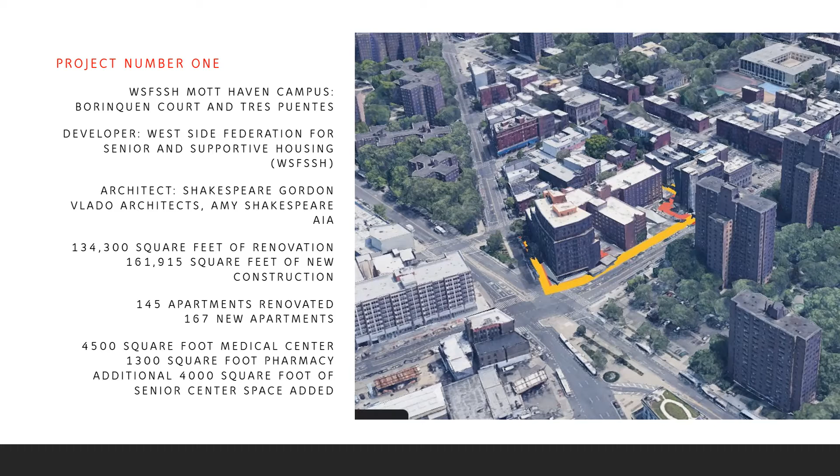This project is located in the Mott Haven neighborhood of the Bronx. It was developed by the nonprofit West Side Federation for Senior and Supportive Housing. There's an existing building in the center of the site that was built in the 1980s, and 2 new towers on the west and east added apartments and additional services to the site.

At the street level, the three buildings are linked. In the west building, there's a 4,500 square foot medical space, 1,300 square foot pharmacy, and social services offices. The three buildings are linked.

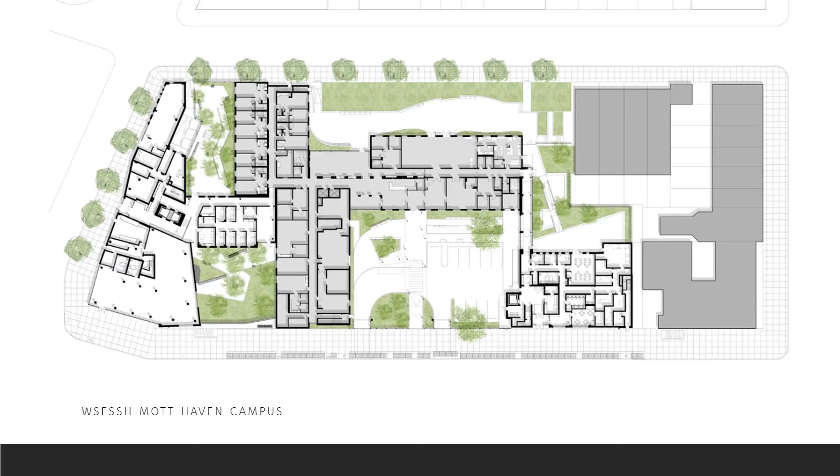In the east building, there's 4,000 square feet of community space, and this original 1980 building has the original community space. There is a circular drive that was added at the front, along with a canopy, to improve the ability to wait for taxis. This is the original 1980 building, which was built as a HUD 202, a federal housing program for seniors.

When Borinquen Court was renovated in 2011, new mechanical systems, new windows, and renovation of 145 apartments were done with the tenants living in place. The new canopy and the circular drive allow residents to wait safely for taxis without having to go out into the street.

The two new buildings are called Tres Puentes, which means three bridges, after the bridges over to Manhattan that are visible from this site. This west building is 11 stories high and has 112 units. At the street level on the corner, you can see the new medical center, and the pharmacy is on the opposite corner.

The building is located on the corner of 3rd Avenue, which is a major shopping street in the Bronx, and East 138th Street. The building site is slightly triangular and follows a main avenue of 3rd Avenue on the left side of the plan.

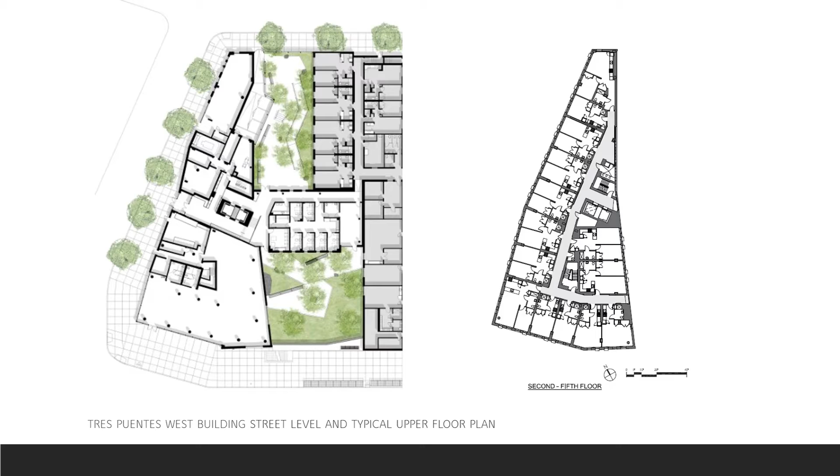The east building has 8 stories, 55 units, and an additional 4,000 square feet of senior center space on the first floor. This end of the site used to be a parking lot for Borinquen Court, which was underutilized.

In this street level plan of the east building, you can see one of the 4 gardens that were added on the first floor with hardscape and green spaces for the residents and the community center.

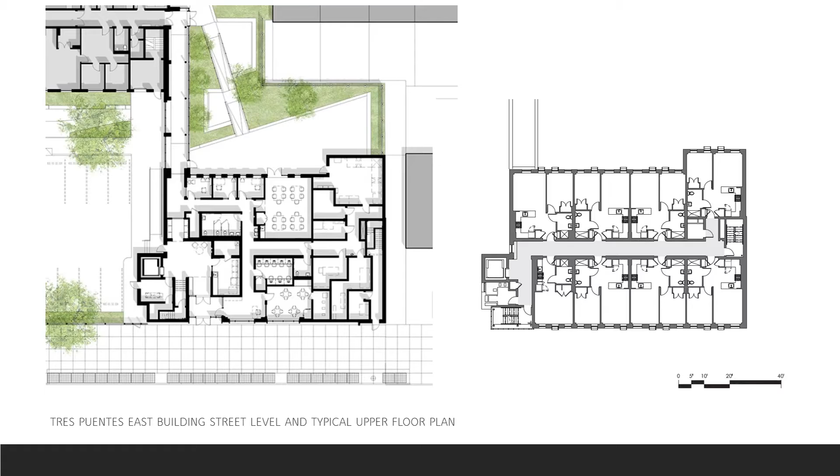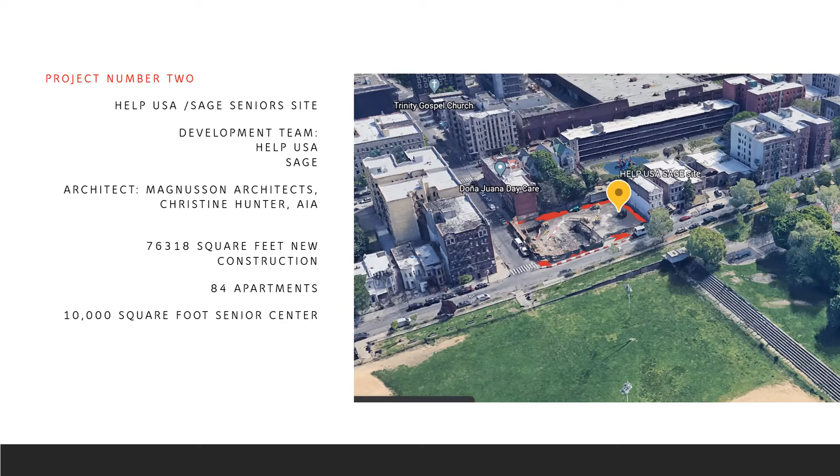On the first floor, you can see that the residents enter their lobby through the corner and that the senior center is entered from the side street.

Most of the first floor is senior center usage. There's a computer room, a wellness nurse, a library, classrooms, a kitchen, and a large commons space.

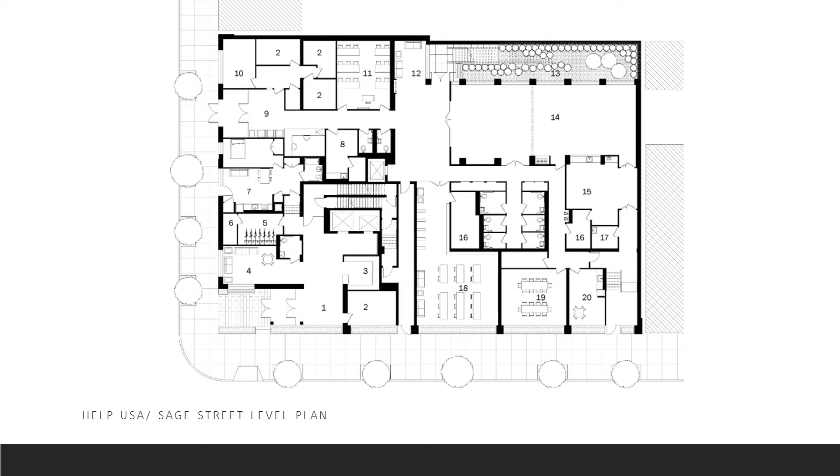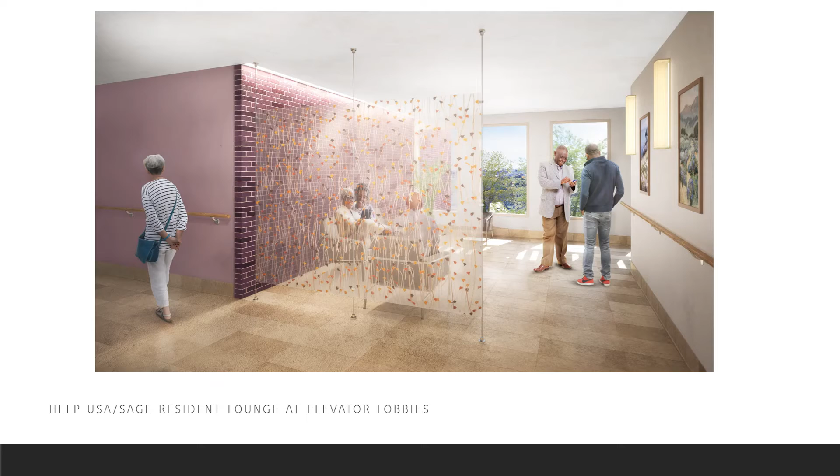There are garden spaces on the first and second floor, which can be used by the residents as well as the center members. On the residential floors, a small seating area is provided at each elevator lobby.

At the top floor, there's a rooftop garden that's provided for the building residents. There's also a community room and laundry room next to this outdoor space.

Roughly 60% of the units in the building are studios, and so an alcove design was developed to allow a little bit of additional privacy for the sleeping area. Rather than creating 2 rectangular units, they interlink.

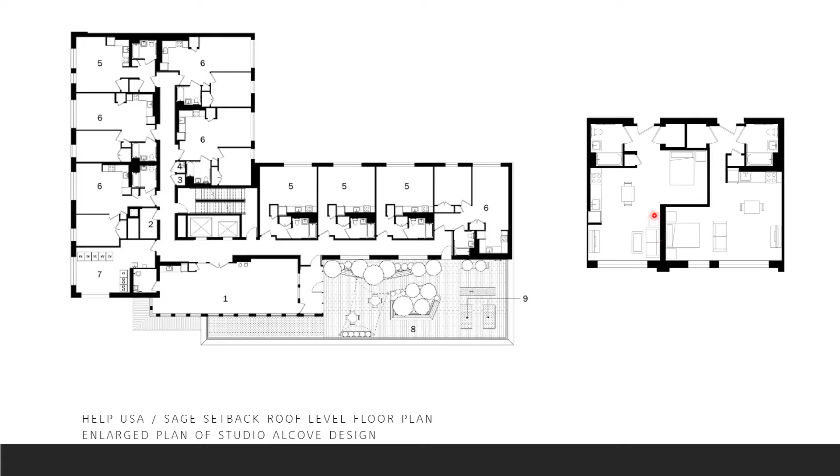The next 2 projects are built within an existing public housing campus. The New York City Housing Authority, or NYCHA, is the largest public housing agency in the US, and it's also the largest landlord in New York City. 1 out of 15 New York City residents live in NYCHA apartments, and these apartments represent 8% of the rental housing in New York City.

On average, 40% of NYCHA residents are senior citizens. Most of the NYCHA apartments are on campuses that have 10 to 20 buildings. These campuses were built in the 1940s through the 1960s, an era when the towers-in-the-park approach was popular. Tall towers surrounded by open space are good in some aspects, but unused open space can be unsafe.

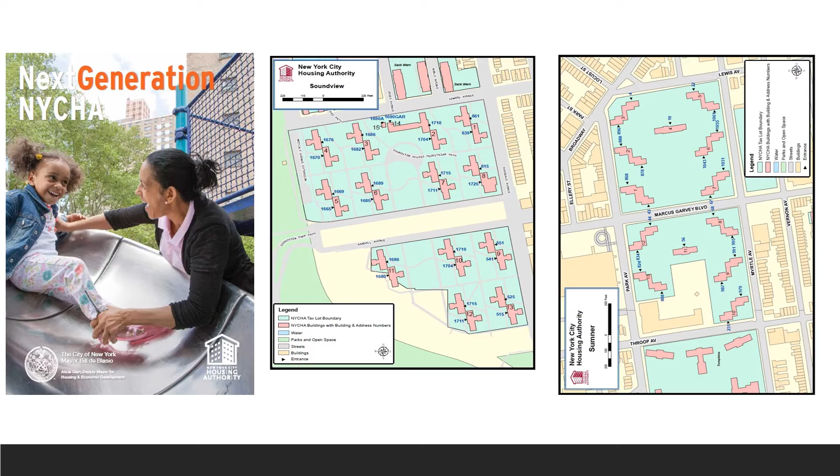In 2014, a series of RFPs sought development teams to provide new housing on the site of NYCHA buildings, and some of them specifically addressed senior housing. There was a community engagement process with existing residents to identify the kind of amenities that each campus needed or preferred. In addition to providing available land and permanently affordable housing, these developments then help fund repairs on the existing buildings.

The NYCHA Soundview campus is roughly 11 hectares, and it has 13 buildings with 1,300 apartments. This campus was completed in 1954. 17% of the units are currently occupied by single seniors. The site for the new development is open land and underutilized parking lot space on the campus.

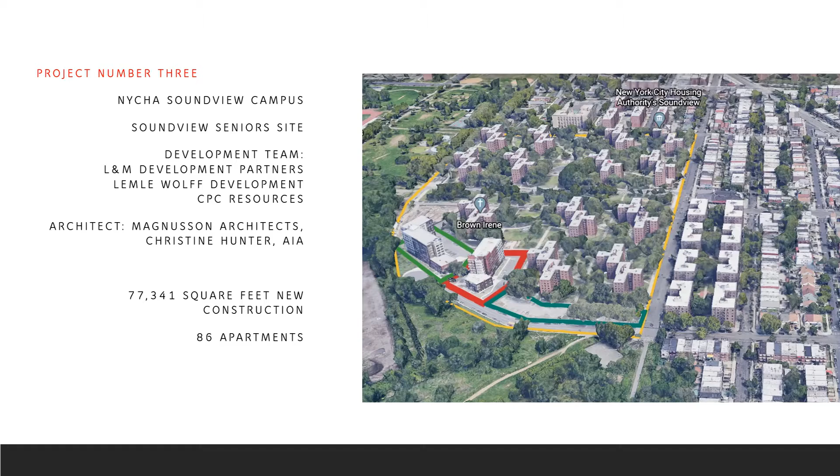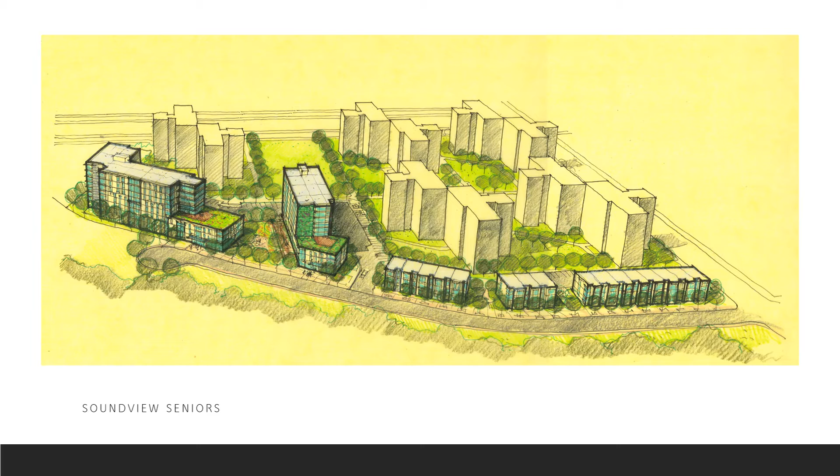The development team is building 3 buildings in phases. The first building is an 8-story building with 120 apartments built for families, shown on the left in the rendering. The second building in the middle is an 8-story senior housing with 86 apartments. The third phase is a home ownership model with attached townhouses, scheduled to start construction later this year.

A community room opens to a garden that is shared between the family and senior buildings, with lounge space near the building entry. This project was completed in 2017 and has nice south-facing and west-facing windows provided with a sun shading detail.

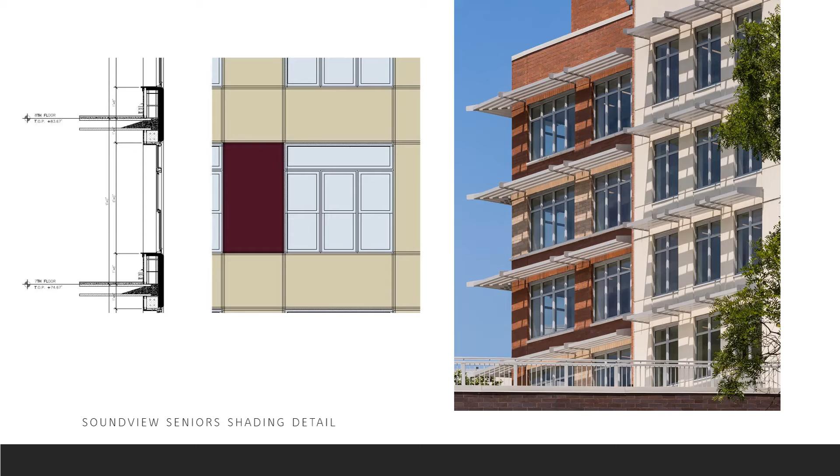This project is located in Brooklyn. The NYCHA Sumner campus is roughly 9 hectares. It has 13 buildings and 1,100 apartments. This campus was completed in 1958. 20% of the units are occupied by seniors living alone, and the site for the new development is currently green space.

The Atrium at Sumner project was awarded to a team of 3 entities, including 2 nonprofits. Nonprofit Self-Help Community Services has their main campus in Queens, and we'll see one of their built projects in a few minutes. The nonprofit RiseBoro Community Partnership was founded in Brooklyn and provides social services to over 20,000 New Yorkers. RiseBoro built the first 100% affordable passive house apartment building in the United States. The third team member is Urban Builders Collaborative, the development arm of Lettire Construction, a builder of affordable housing.

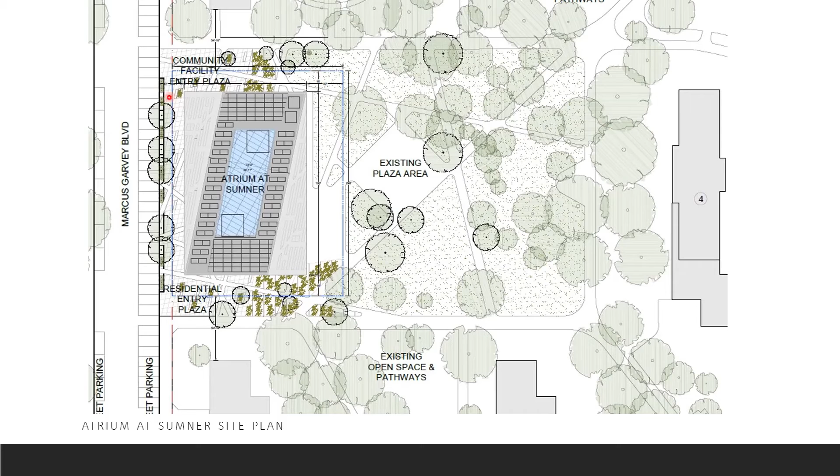In siting, the building entries face plazas rather than facing the street, in order to better link the building to the existing buildings on the campus.

The interior plan is laid out around a 9-story atrium, which is an unusual typology for American housing. It means every apartment door will have a view of the sky and that cross ventilation is improved. You can see here the glass-topped atrium roof and the solar panel arrays up on the roof.

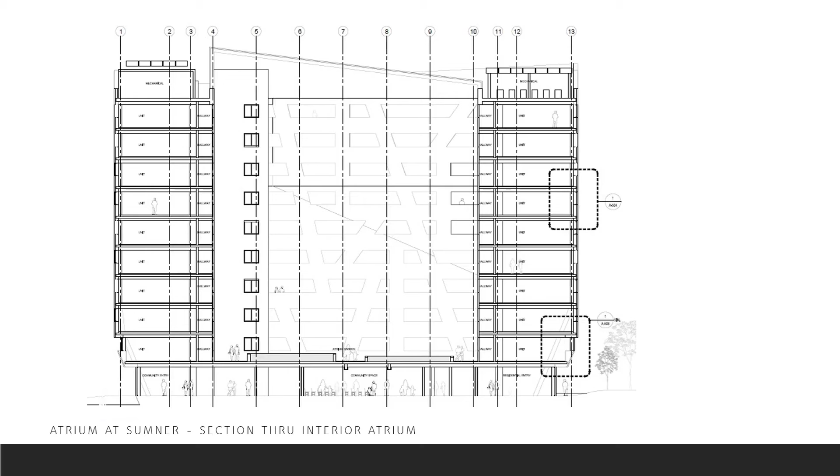This building has a striking facade with monolithic sloped surfaces designed to break down the building mass. The building actually folds and slopes inward at the base, widening at the street plazas where the entries are.

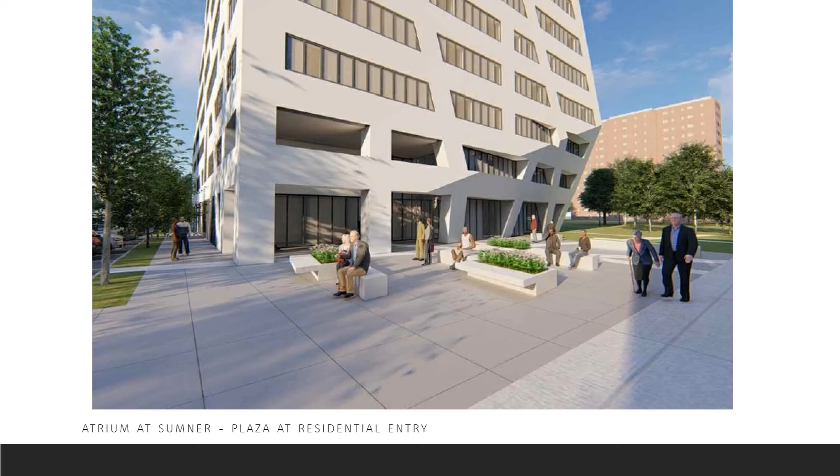On the south side of the site is a plaza with the entrance to the residential building. There's a 2-story high entrance underneath the overhang, and at the street there's a meeting room and social services offices for the residents. On the 2nd through 10th floor, there are 180 apartments.

The street level plan on the left shows the community center entry from the North Plaza at the top of the plan and the residential entry from the South Plaza. Social services, office, and meeting spaces for the residents are next to the building entry.

The plan on the right is the 2nd floor plan. It shows the interior winter garden at the base of the atrium. There are 2-story high spaces here and here that allow a view down to the building entries. Off of the Winter Garden is a library and community room, laundry, and exercise room for use of the building residents.

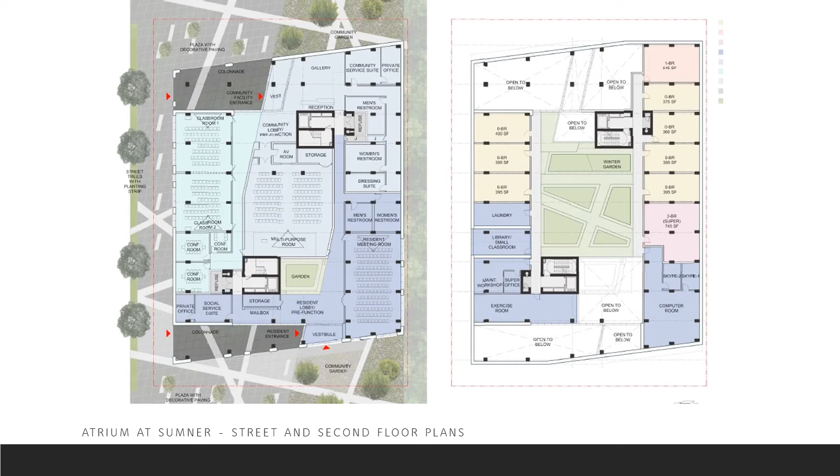This next project is only a few blocks from Sumner Houses. The nonprofit developer is Southside United Los Sures, which was founded in the 1970s to fight displacement in the South Williamsburg neighborhood of Brooklyn. Their Rheingold Senior Housing Project is a 94-unit residence for seniors, and it's just started construction.

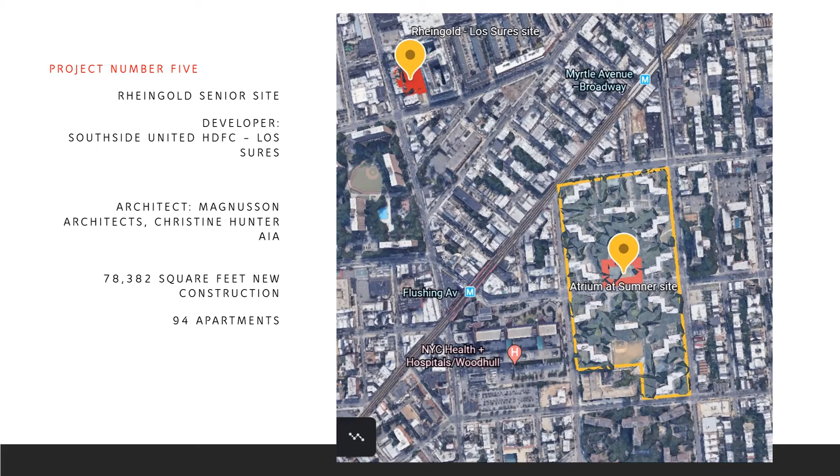The design is a passive house construction and has a rooftop level urban farm designed for hydroponic farming. There's a solar array to provide some on-site power. This project was recently awarded $750,000 from New York State to recognize the significance of the energy-saving elements in the design. The energy use intensity, basically energy use per square foot of this building, is less than half that of a typical apartment building in New York City. And the rate of carbon use per square foot is a quarter.

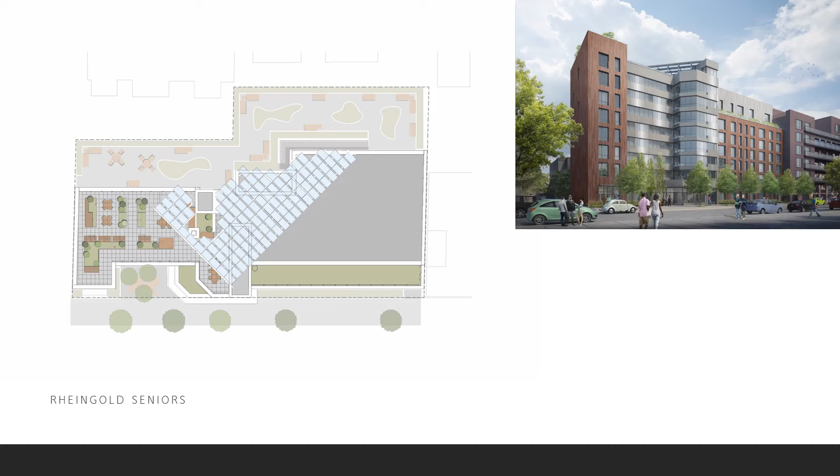The site was a bit difficult because of the lot. The lot is shallower on one portion than typical. So the architect developed a plan with a single loaded corridor on one side, and then on the other portion, a more typical double loaded corridor with apartments on either side. It's hard to tell from the drawing, but to encourage use of the stairs, they're designed to be shallower than required by code, so they're easier to use. Also, one facade of the stair is finished with glass to allow natural light in. All of this to encourage use of the stair.

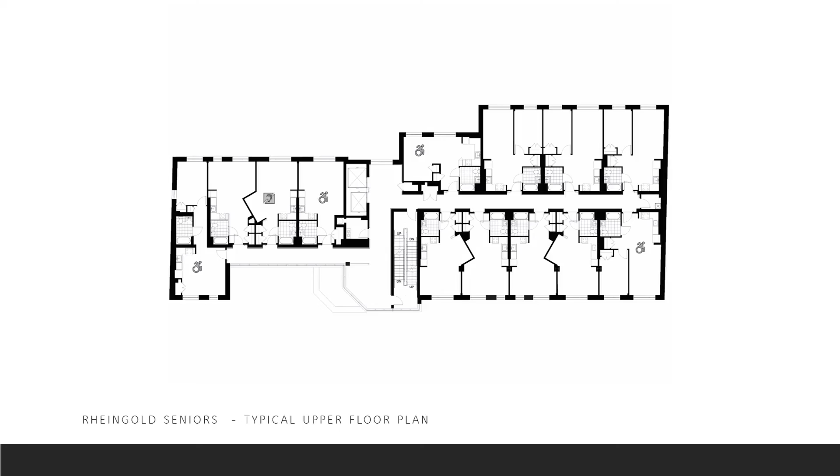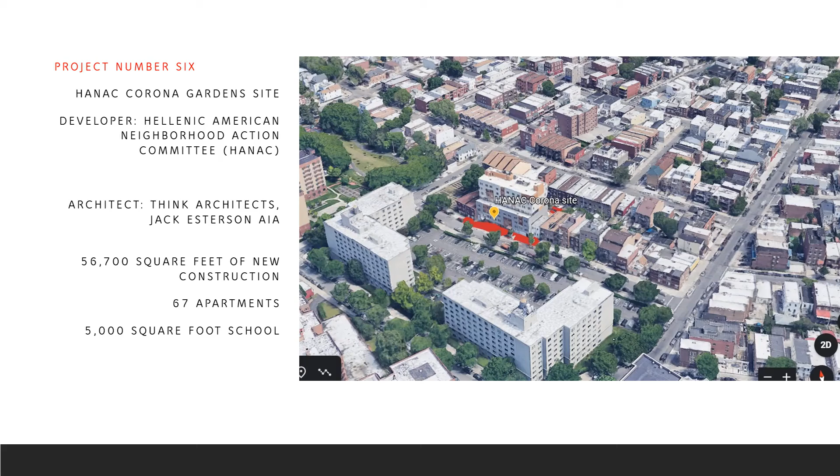We're now in Queens, in the Corona neighborhood. This project was developed by the nonprofit Hellenic American Neighborhood Action Committee, or HANAC, which was founded in 1972 to provide a range of social services for youth and seniors, including adult literacy and workforce training. This site was previously vacant land, but it was in use as a community garden, and so money had to be raised to replace the garden as part of the work done to build the project.

Corona Gardens has 67 units on 8 floors. When it was completed 2 years ago, it was the largest passive house senior housing building in the United States. It has features such as triple glazed windows and a high efficiency envelope. There are social services offices located adjacent to the resident lobby.

In addition to social services for residents in the neighborhood, the program concept for Corona Gardens is intergenerational. There's a resident lobby on the left and a kindergarten entrance on the right. The first floor plan shows the kindergarten in blue and the residents to the left of it. The seniors have a garden space in the rear yard and the children have a garden space in the rear yard, and they are intentionally adjacent to each other.

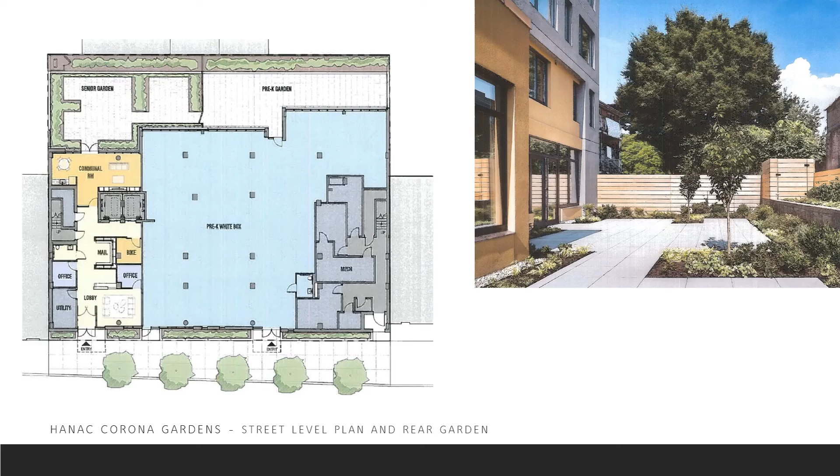The building sets back at the 5th floor, which allowed for a small roof garden for the residents next to a laundry room and a community lounge.

Our last project today is located in Flushing, where there's a campus of 6 residential buildings, a senior center, and a medical office. They are operated by Self-Help Community Services. Self-Help was founded in 1936 and provides social services, including home health aides, to 20,000 New York City seniors.

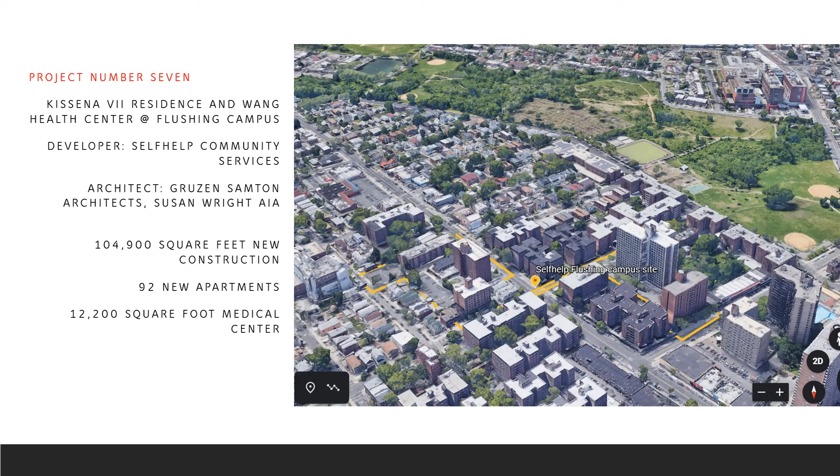The new 15-story residential tower provides 92 new units for seniors. The 3-story community health center is built forward of the building at the street wall. Since the construction of this 19-story building in 1968, the zoning had changed to allow more density. The original site was also designed with a large paved garden in front that was not used at all. A green space in the rear was able to be retained.

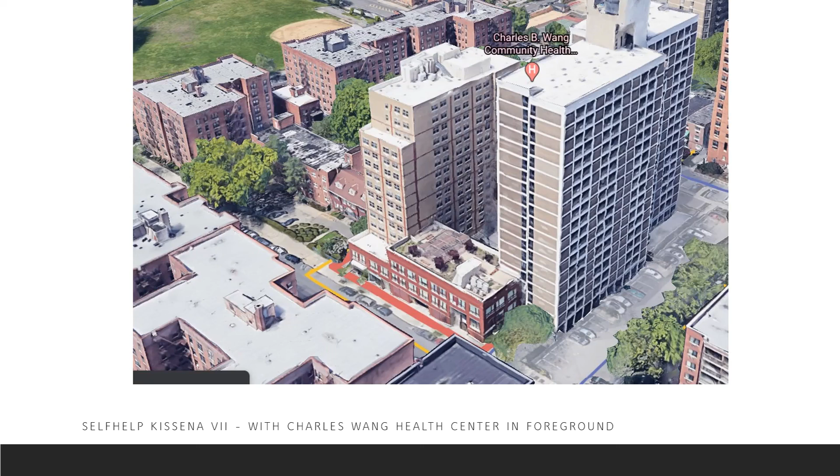There's 60 feet of clearance between the 2 buildings here. The community health center is in the front at the street level. The new residential entrance is here, and the community health center is here.

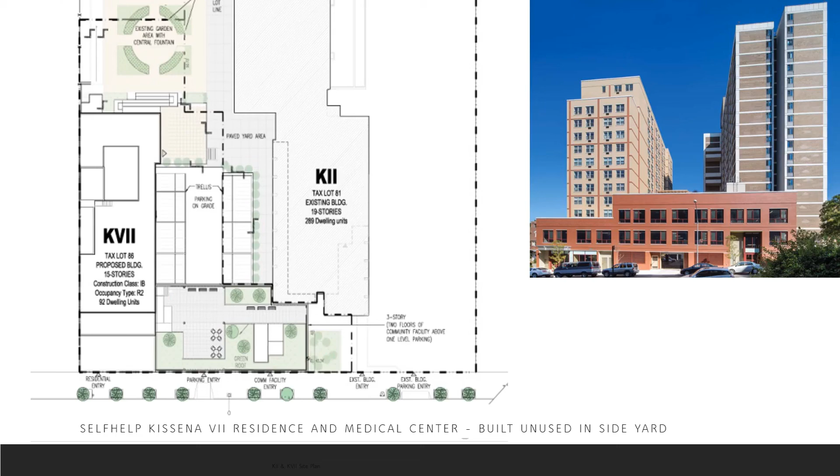In order to fit on the narrow site, the building has a single loaded corridor, so all of the apartments either face the rear yard, the courtyard, or the front. There's also a tenant roof deck on the roof of the community health center that provides some green space.